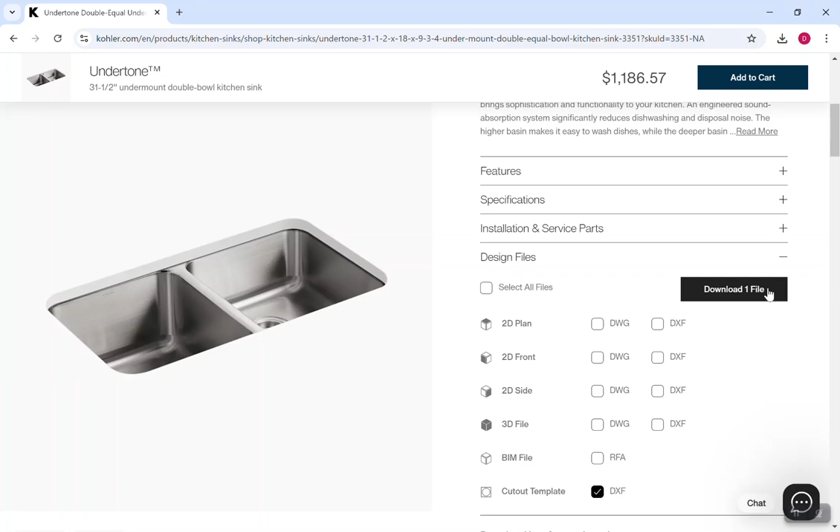Click download, it should download. Once we download the file, we're going to come into Raptor again. We're going to go to insert and import from a DXF. This is going to create a new page.

We're going to click on the file, open it up, and as you can see, it's got lots of different options here for different colors that they used. I am going to come into here and change all of these to something different. This is going to help us filter out everything a little bit later.

So I'm going to hit next, inches, hit next, and it's going to create the file. Now, once it creates the file, you're going to notice all of the different options popping in here, all in different colors. First thing I'm going to notice is what is the reveal set on their drawing.

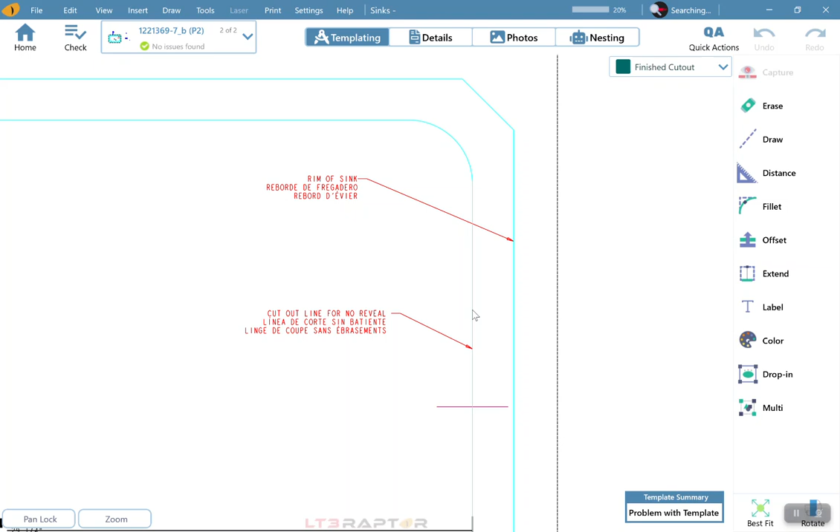Cutout line for no reveal, meaning this is a flush reveal. This is the rim of the sink. I am now going to hit best fit.

I am going to double check the measurements. 29 1/4, 15 3/4. Distance, parallel is your best friend here. 15 3/4, 15 3/4. 29 1/4, 29 1/4.

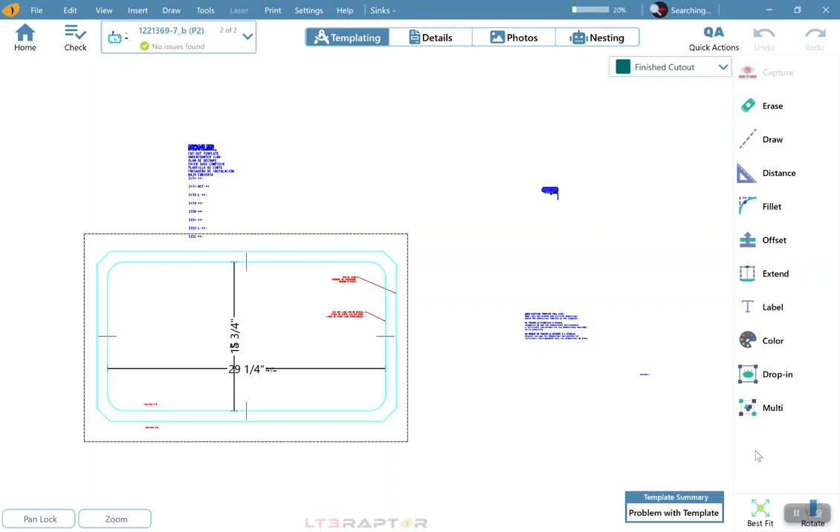Once I know the sizes are verified, I am now going to hide the cutout and the flange. Color, filter, and I'm now going to turn off the flat polish color. Once I do this, the drawing itself will hide those.

Now I can use my multi-tool to highlight and erase everything else. Back to my color wheel, filter, I'm going to turn flat polish back on. And now you can see all we are left with is our cutout.

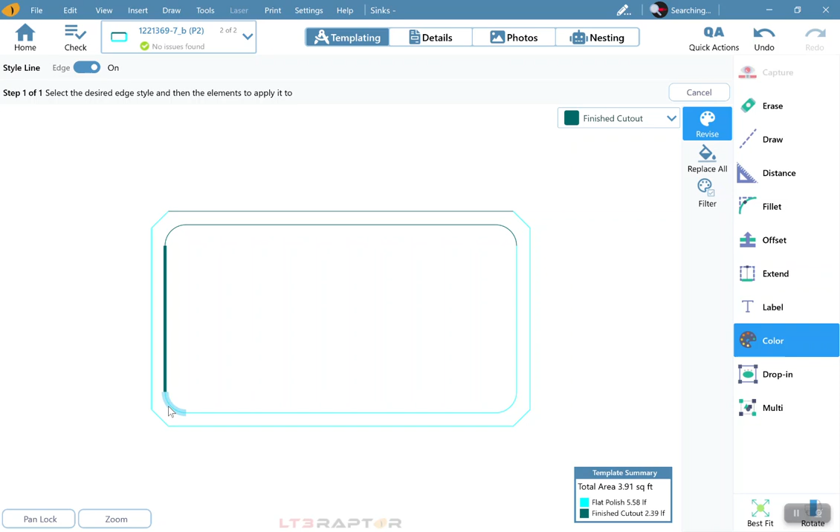Now I'm going to go to my color wheel again. This time I'm going to revise my colors. I'm going to use finished cutout to get the inside of my sink the color that I want right now. I am then going to change the outside to cabinets.

Cabinets can be widely used for different things, but in this case, it's a reference line. Later on in our process, when we go to create our saw pages, we can remove those without removing the cutout itself.

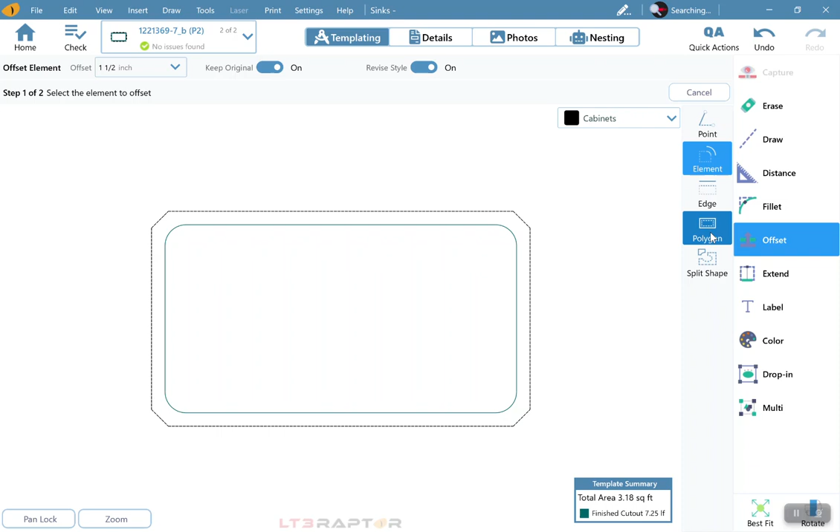The next thing we're going to do is decide whether we're keeping a flush reveal or if I need to offset. If I'm going to offset that line, I'm going to use offset polygon.

We are going to set our distance. We are then going to go and turn off keep original. This now allows me to select the sink and move the cutout in, creating a negative reveal. Now, once I create that negative reveal, I want to make sure I do have my colors the correct way.

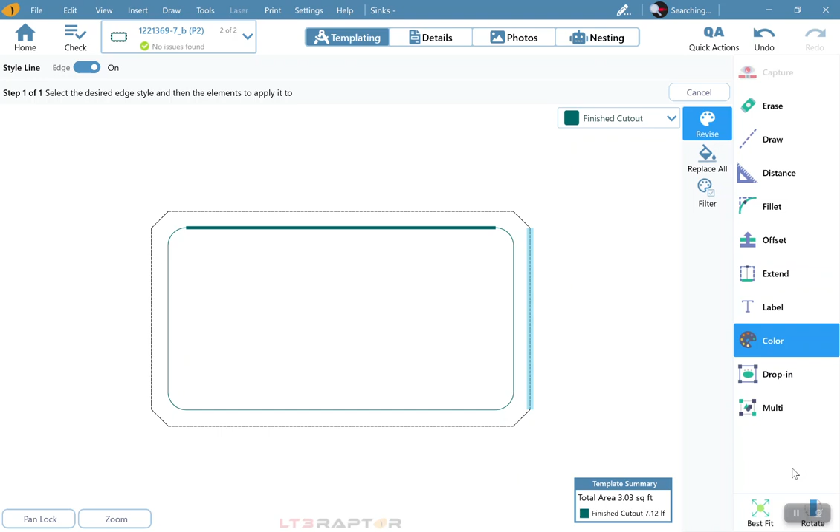Once we have that, we're now going to set the origin. I want the origin to be at the bottom center of my cutout. I'm going to do that by first finding where it is. As you can see, the dot in the bottom right, that is our origin or our 0, 0.

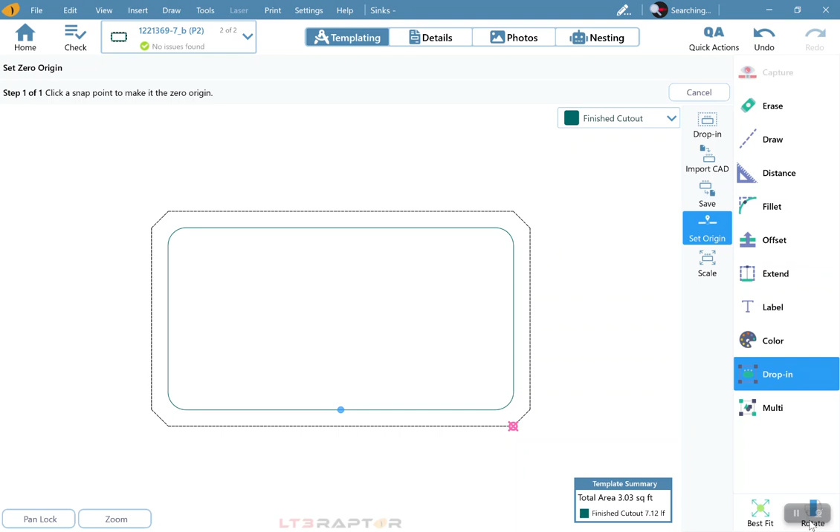I'm now going to come to our drop-in file. I'm going to click set origin, and this is how I can then click on a snap point to move it. As you can see, it's now located at the bottom center of the sink.

Now I'm going to come to the save section. Inside of the save section, I have company drop-ins and my drop-ins. Company drop-ins are shared across every user in the company. My drop-ins are only for me.

I'm going to save this to the company drop-ins. I am now going to come down to the folder for the brand name. And as you can see, I already have this saved as a flush. So I'm going to click on this, and I'm just going to change that from flush to 0.25 and NEG for negative. I'm now going to click save.

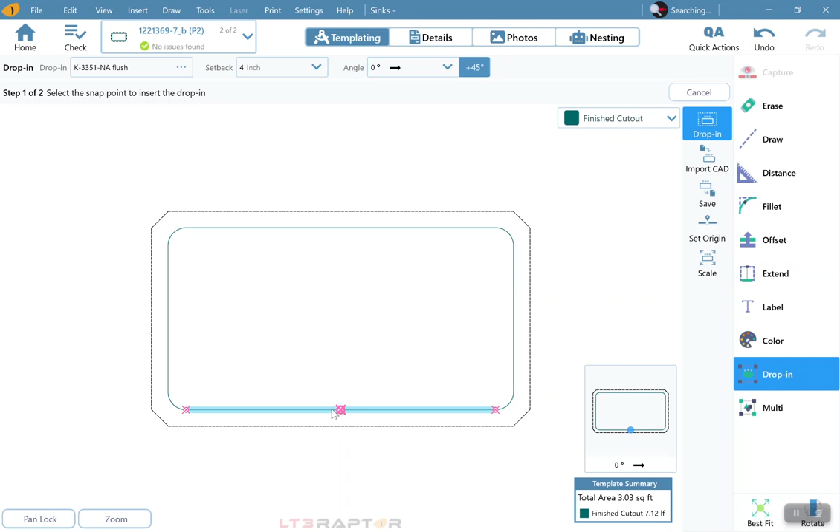At this point, if I come in and look at my drop-ins, I'm now going to have a flush and a negative sink. This is going to allow me to place this sink right on that origin point on any of my drawings, and then I can set it back with the reveal.